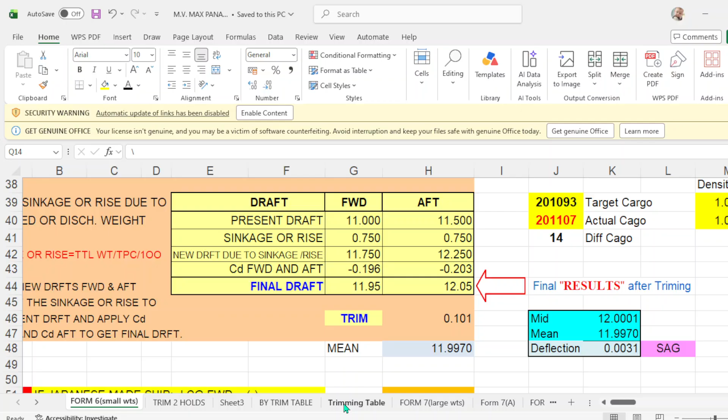Okay, so I use the program with the Max Panama. This is the vessel, MV Max Panama. So let's start.

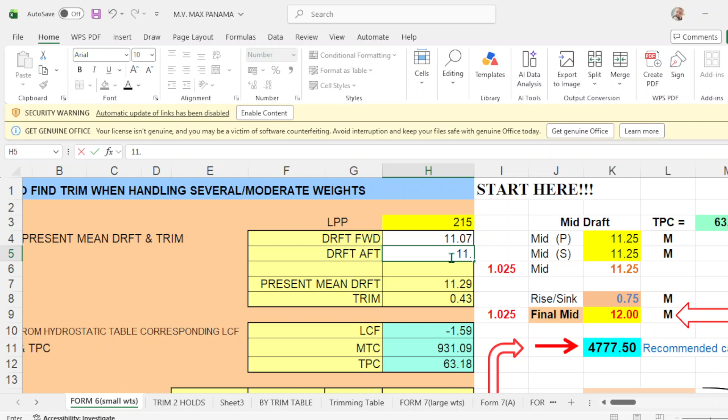What is his present draft forward? Present draft forward is, okay let's make this bigger, present draft forward is 11.07. And his aft draft is 11.35. And take note that the mean is 11.21.

So let's say the actual midport is 11.21. And the starboard actual mid is 11.21. No list. Okay.

Then according to the problem, it doesn't say here the final departure or departure draft. It doesn't say. It says the amount of cargo to be loaded is 1,965.

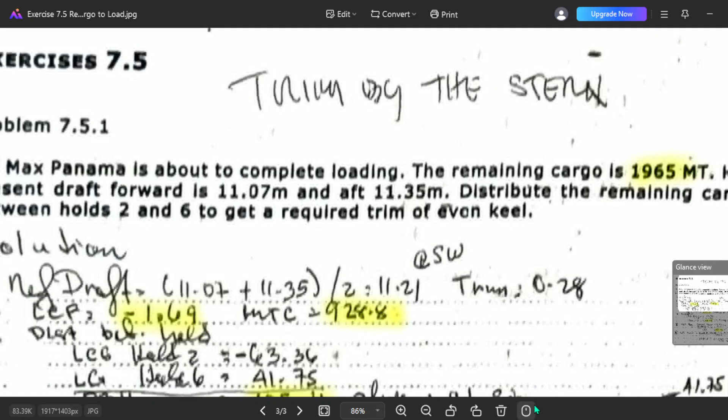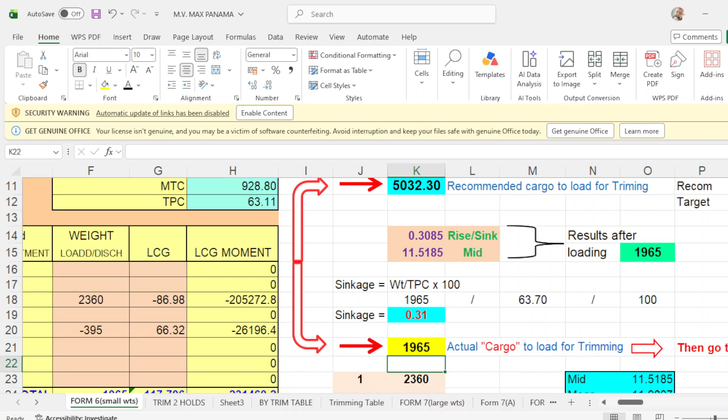1965. So this 1965, we don't have yet a departure draft, so we just put this to 0. So we don't know yet our departure draft.

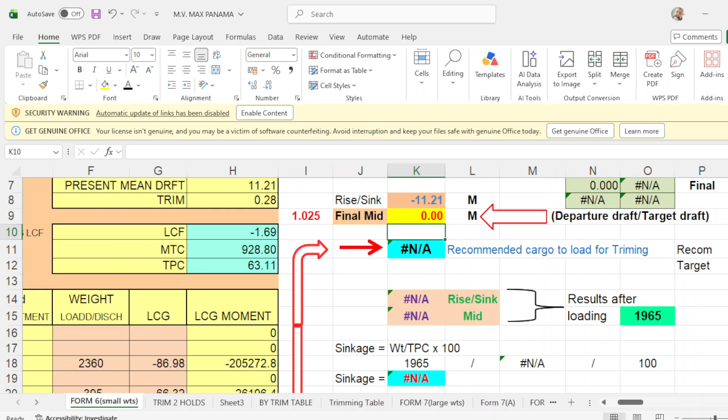Okay, so what we know is that we have to load 1,965. So I go up and I put here 1965. And beside this one, you put the initial TPC of the initial draft. So TPC is 63.11. Put here 63.11.

And this amount of cargo to be loaded of 1965 divided by your TPC of 63.11 is 31.15. Divide this by 100, that will be 0.311 or 0.31. Okay, that is the sinkage.

So your present mean draft is 11.21 plus your sinkage of 0.31, that will be the final draft is 11.52. Now this will be your final draft. So if you put here, final draft is 11.52.

And take note that the value of the cargo recommended to load is almost the same. It was 1 ton difference. Okay, so what we do? 1 ton difference.

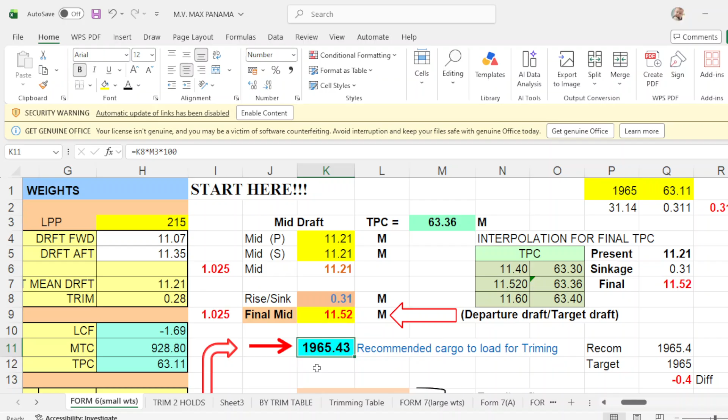Let's say make it, reduce it a little more. Make it 1. Oh, so make it... now it's 1965. So it's here, almost the same here.

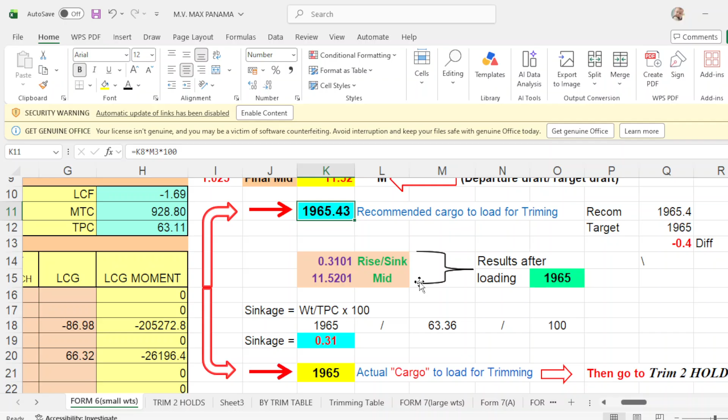1965. So what's the result after loading 1965? Then your draft is 11.5201, which is almost the same here, and your sinkage is 0.3101. It's almost the same, no? The same.

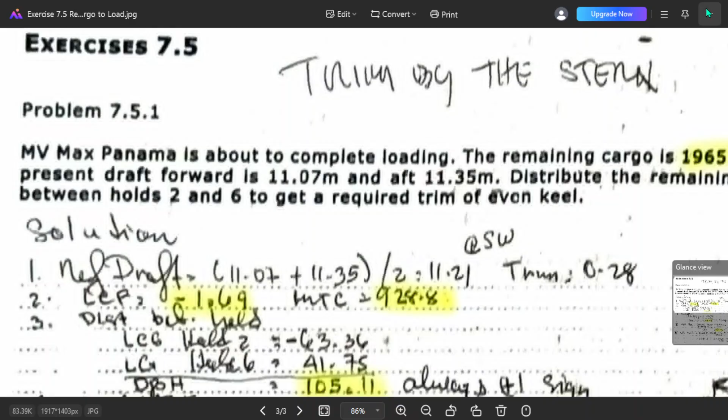Then he says distribute the remaining cargo between holds 2 and 6 to get a required trim of even keel. So we have to distribute this to holds 2 and 6 and make it even keel. So this is the actual cargo to load for trimming.

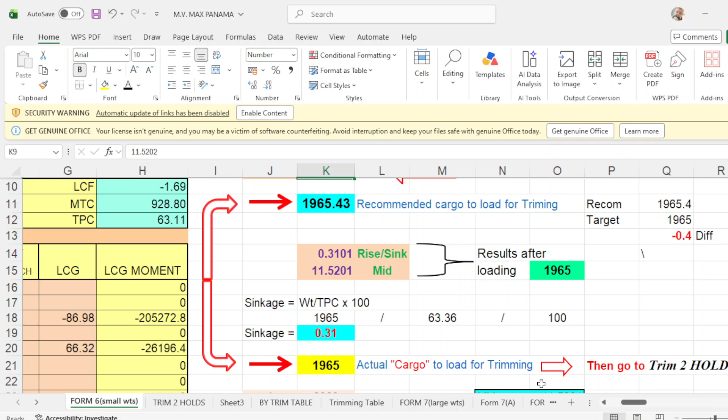Then go to trim 2 holds. So you go to trim 2 holds. There you go. Trimming with 2 holds. Take note of the remaining cargo to load is 1965. Okay, this is the initial draft, mean draft, trim, and the initial MTC, LCF, and TPC.

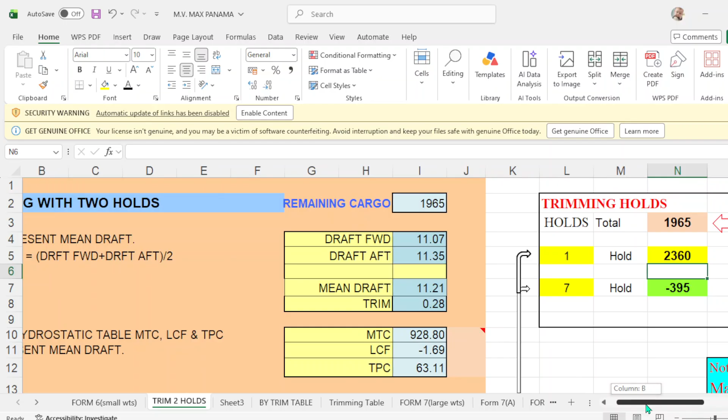Move this a little further aside. Then your trimming hold is 2. Okay, enter. And 6, take note 6. And you scroll down. It says...

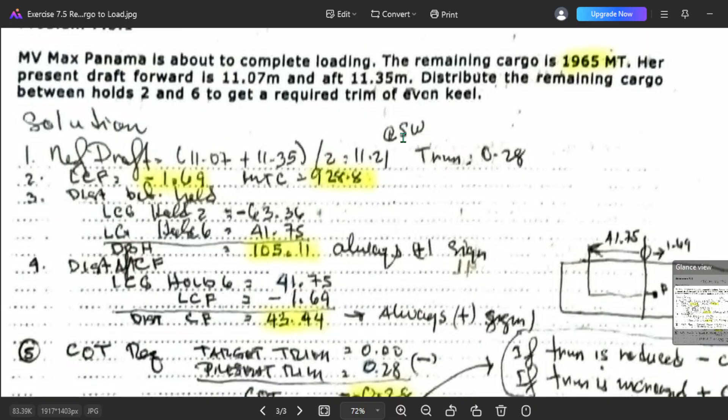The problem says it should be even keel. Required trim of even keel. So make it even keel, so final trim should be 0 because of even keel. Then you scroll down.

How much are you going to load in hold number 2? That will be 1059 or 1059. So go up.

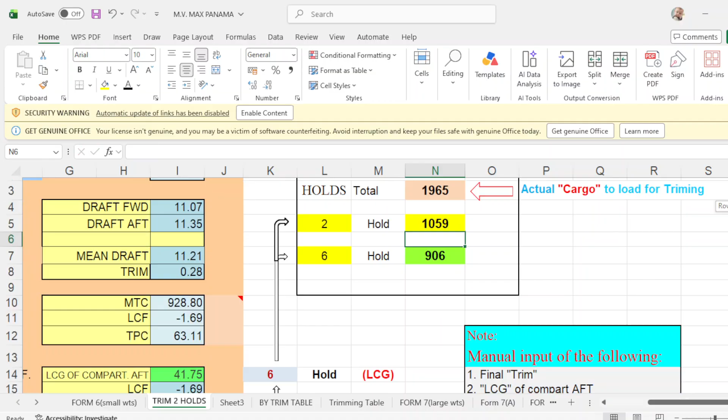1059 there. And number 6 should be 906, okay? Number 6 is 906. Run it up. And your final draft or departure draft: forward is 1152, aft draft is 1152, zero trim, and your mean is 1152.

Deflection is 0. Okay, so how did I get your mid draft? Press this equals, go to form number 6. When you load 1965, this will be your mid departure mid. Press enter. There you go. And your mean, press equals. This is your mean. Then your deflection is 0. Then we go to form number 6.

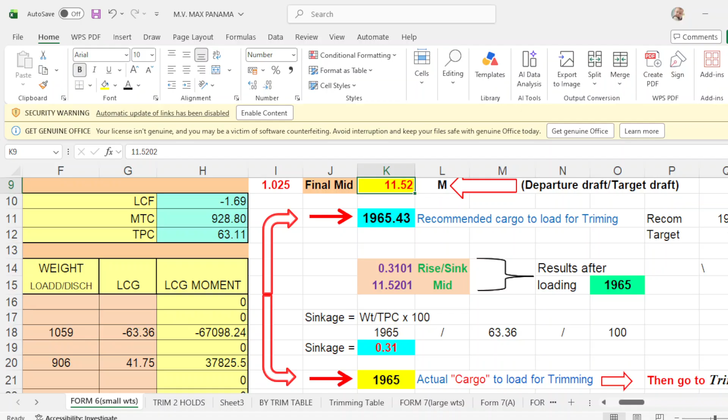Take note of the cargo's trimming: cargo is 2 and 6, and the cargo to load in 2 and 6. 2 is 1059 and 6 is 906. So from here, you put the cargoes 2 and 6, the load, the cargo to load in each cargo, which is 1059, number 6 is 906, and let's check the LCG.

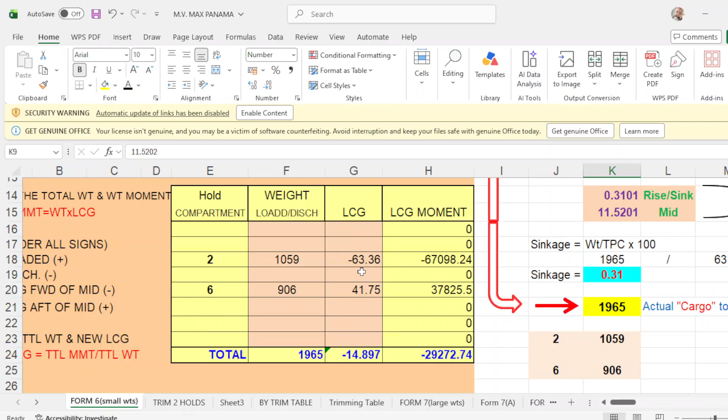Apply the LCG. Okay, scroll down. The LCG of number 2 is negative 6336, and hold number 6 is 4175. Then scroll down.

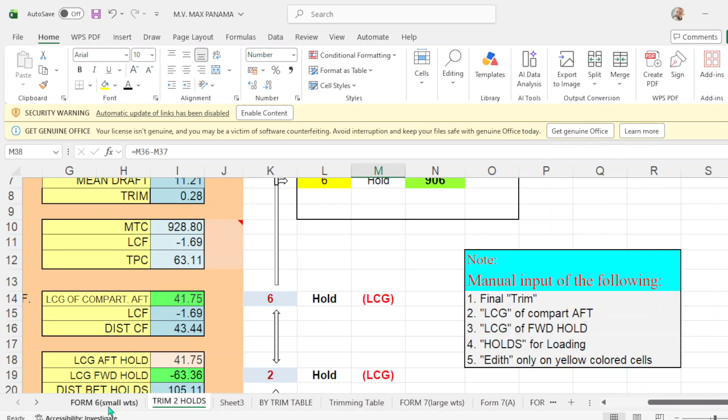Your departure drop forward is 11.52 and aft draft is 11.52. Your trim is 0. Your mean draft is 11.52. So you met the criteria of the problem: distribute the remaining cargo between two holds to get a required trim of even keel. So we are even keel, okay, we are now even keel.

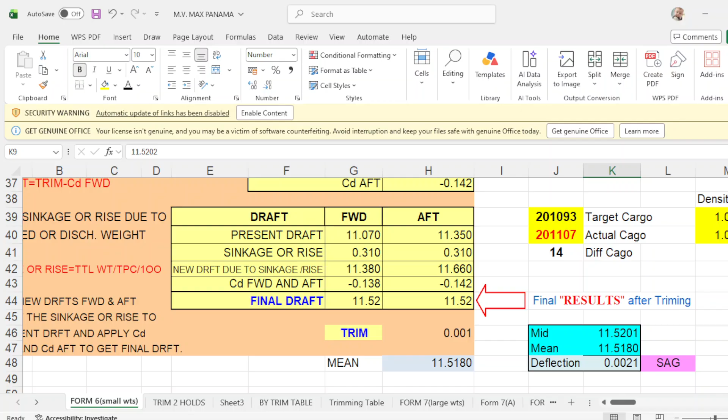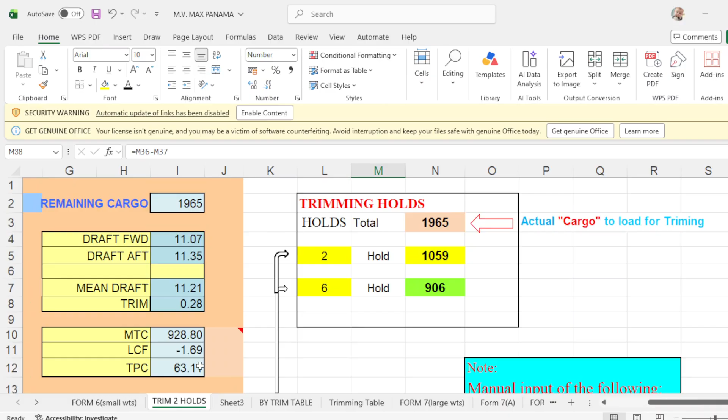And your mean draft is 11.52. That is program number 1, which is how to find trim when handling several moderate weights. This is for number 6, and trim 2 holds. Okay, trimming with 2 holds.

Scroll down. And here you have even keel: forward 11.52, aft 11.52, 0 trim, and your main is 11.52 with 0 deflection. Then the third program is the trim table, by trim table.

Trimming table. Take note of the remaining cargo to load is 1965, and your trimming hold is 2 and 6. This is the cargo to be loaded in number 2 and number 6. Then we will apply the correct forward and aft correction of hold number 2 and hold number 6. Then we go to the trimming table or correction table.

Our draft is almost 12 meters because it's 11.52, it's almost 12 meters. So you select the 12 meters and hold number 2, and the forward correction is 4.8. Okay, then you put here 4.8. Just a moment.

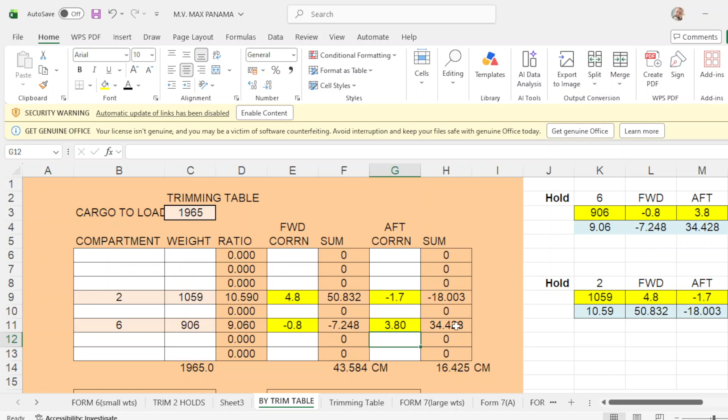9, there you go. Then we will adjust aft correction. Now the trim is 0. We will now adjust this aft draft. So aft correction, we make this 9. Okay. You are now trimmed by the stern.

So make this trim by the stern. Make this 5. Say make this 5, forward. Or make this 4.95, 4.95, 4.95. There you go. You are now even keel of 11.52, 11.52, and your deflection is 0.

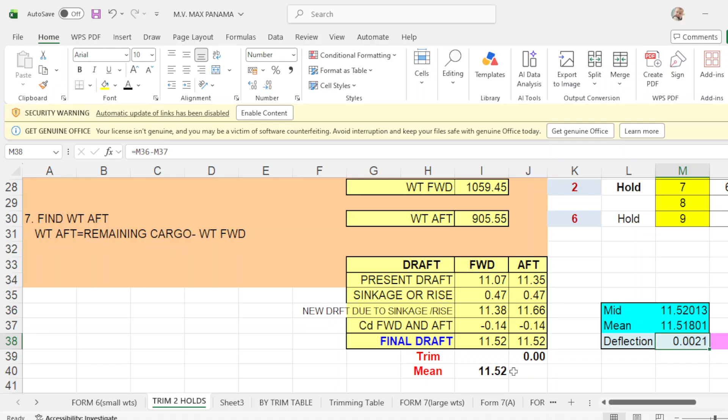Okay, so this is your third program. First program is form number 6, which is even keel of 11.52, forward and up, trim 2 holds, even keel of 11.52, forward and up, and by trim table, your third program is even keel of 11.52, forward and up by trim table.

And the last program, the fourth program, is form number 7. Form number 7 is how to find draft and trim when handling weights involving large changes in mean draft. So the density is 1.025 because it doesn't mention any density here, so we assume that it's already salt water density 1.025. Okay, and what is the draft forward? Is 11.07, put here 11.07, and aft draft is how much? Is 11.35, put here 11.35.

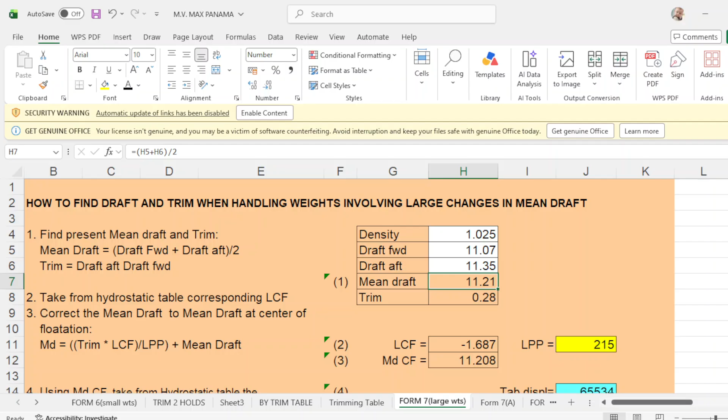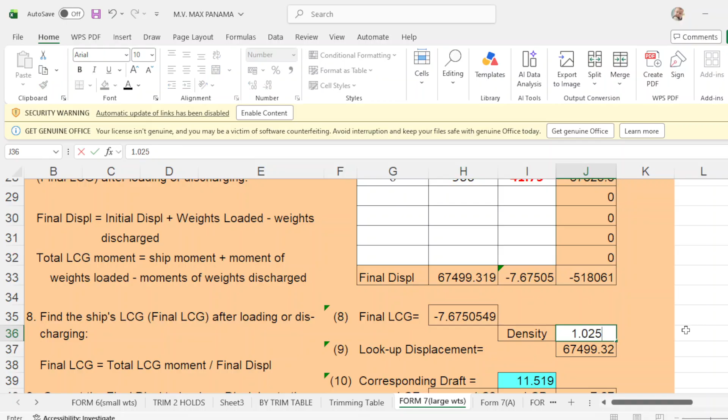11.35. Okay. Then your drop, your density all throughout after completion of loading is 1.025. It was salt water, 1.025. Okay. Then you apply here the cargo holds 2 and 6.

How much are you going to load in 2 and 6? Okay. 2 is 1059, and 6 is 906. Okay.

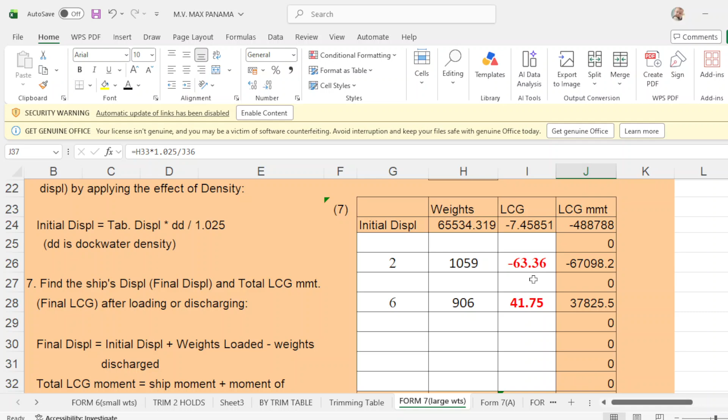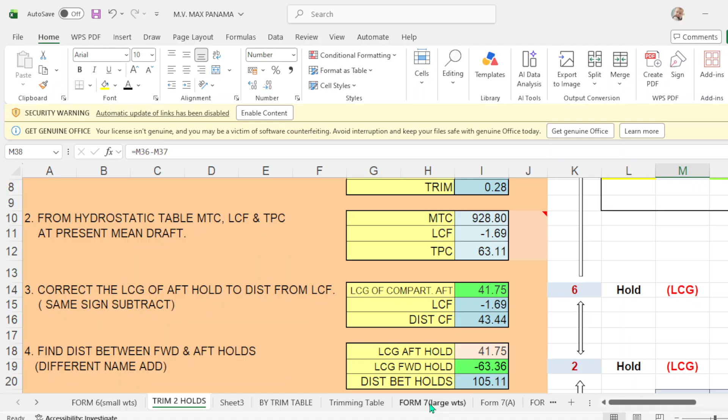Then what is the LCG of hold number 2 and 6? The hold number 2 is how much? LCG of hold number 2 is negative 63.36. And hold number 6 is 41.75. Okay, confirm.

Once it is confirmed, scroll down. Take note that your mid draft here is 11.519, which is almost 11.52, and the forward and aft draft and the mean draft is even keel of 11.52. Forward 11.52, aft draft 11.52, mean draft is 11.52. Zero trim, and your deflection is 0.

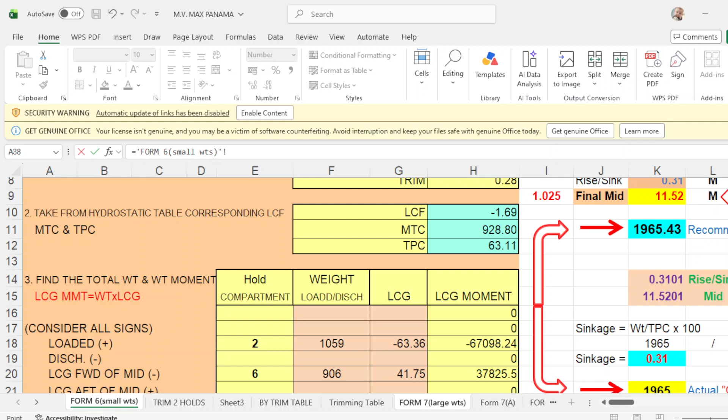Again, how did you get your mid draft? This equals. Then you go to form number 6, go up. Once you load 1965, I'm sorry, once you load 1965, then this will be your mid draft, partial mid draft, 11.5201. Okay. Click this one and press enter.

Then there you go, 11.5201. Then your mean, press equals, and this will be your mean. Okay. Then your deflection is 0.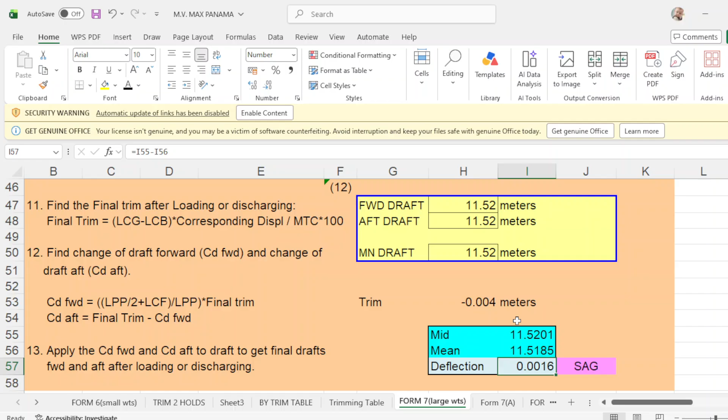So we have 4 programs. Form number 7, even keel. Number 2, by trim table, even keel. And by trim 2 holds, it is even keel. And by form number 6, this 4 program is also even keel. Okay. Now,

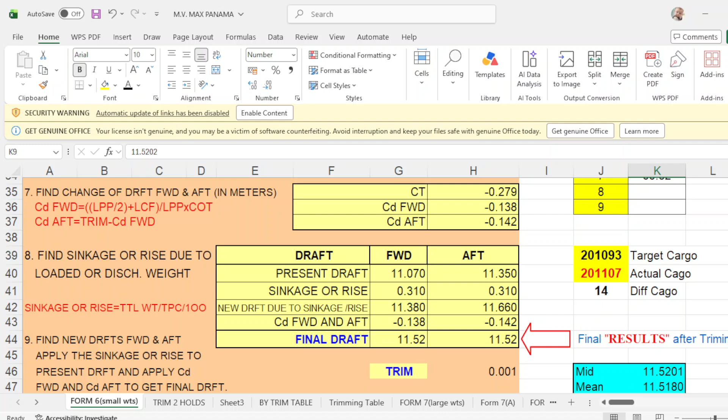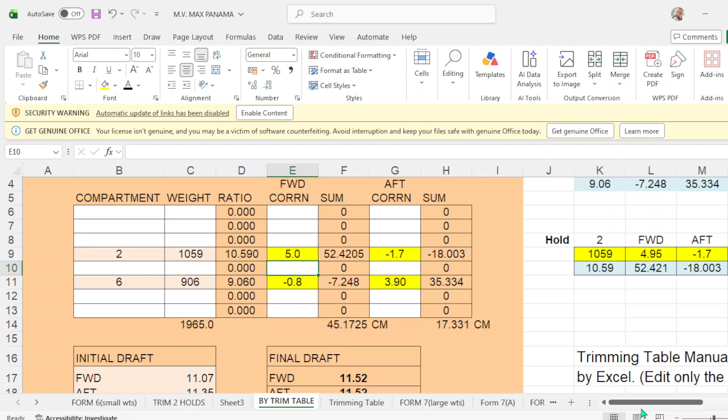In trim table, you don't know which cargo load to load first. It's either 2 and 6. But I prefer to load hold number 6 so that you will have a good trim before going to be even keel. So here, I made a program that you should load first hold number 6, after that you load hold number 2.

So take note, hold number 6 is 906, cargo, forward is negative 0.8, and aft correction is 3.9. In hold number 2, cargo is 1059, forward correction is 4.95. Okay, 495. Make this like this. 495. So 495, and your aft correction is negative 1.7. Okay.

This is your initial draft. Forward 11.07, aft draft is 11.35. Once completed loading of 906, then your draft would be forward 11, and aft will be 11.70. You are trimmed here by the stern. So after loading number 6, then you will load in number 2 of 1059.

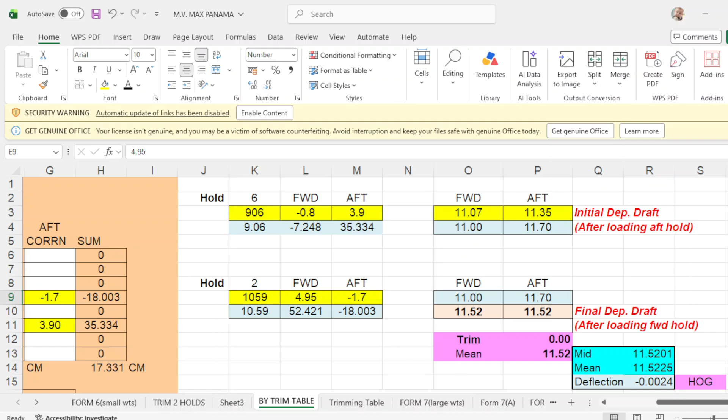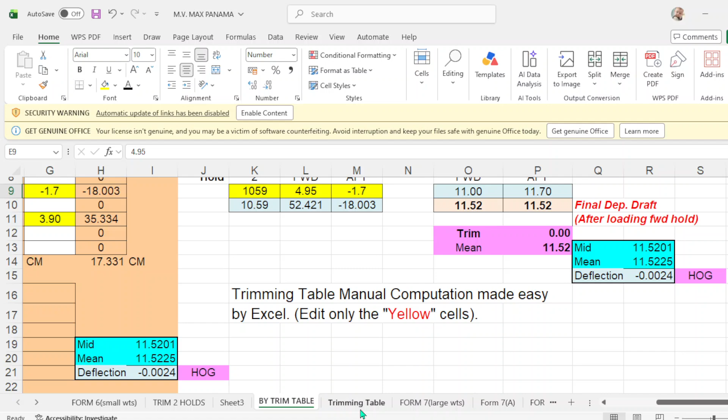After loading 1059, then your departure draft forward will be 11.52, aft draft 11.52. Your trim is 0, and your mean draft is 11.52. Okay? And your deflection is 0. This is the same as this one. Okay, this is for the vessel Max Panama, which is this one. Okay?

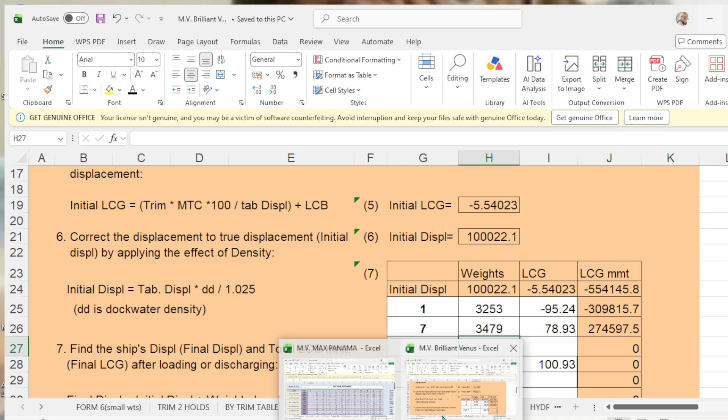Max Panamax. Then, for example, another capesize vessel would like to load the same drop, and that will be another Panamax vessel. That will be MV Brilliant with 7 holds. Okay? With 7 holds. Okay? Assuming it's also to load the same amount of cargo, the same drop.

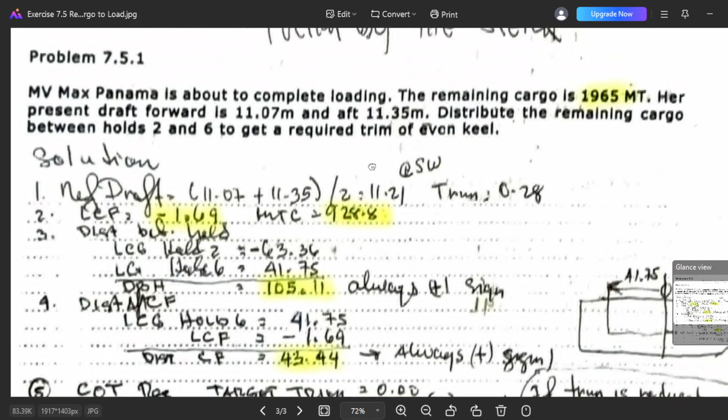So we put to form number 6. Go to form number 6, which is how to find trim when handling several moderate weights. Okay, the draft forward is 11.07. Aft draft is 11.35, 11.35, which is, okay, draft forward is 11.07, aft is 11.35. Okay,

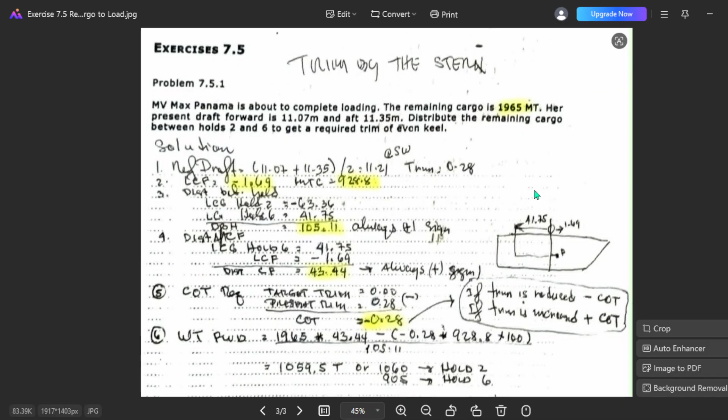then the actual mid port would be, for example, 11.21. The same with your mean draft here. Actual mid port 11.21, and mid starboard is also 11.21. Okay, you don't know yet your sailing draft, what is 0, but you know already how much cargo to load, which is how much, which is 1965. Okay, so you put here cargo to load of 1965.

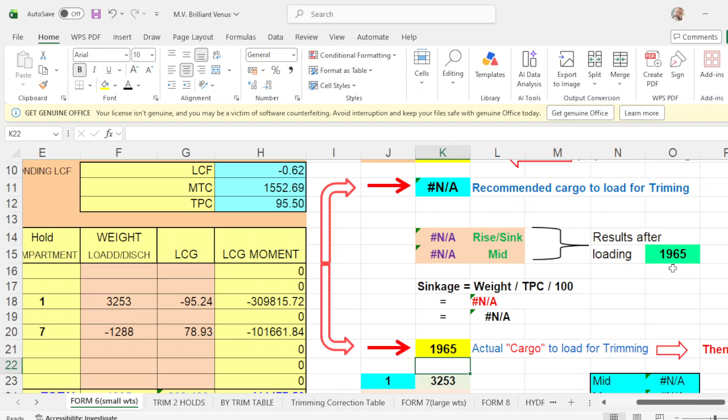1965. You don't know how much your departure draft will be after loading 1965. So what you do is put 1965 in this cell, and beside it you take out the initial TPC of the initial draft. The TPC is 95.50, so you put 95.50 here.

What you do is take this amount of cargo and divide it by your TPC of 95.50, that will be 20.58. Divide this by 100, that will be 0.21. You put this one to be exact.

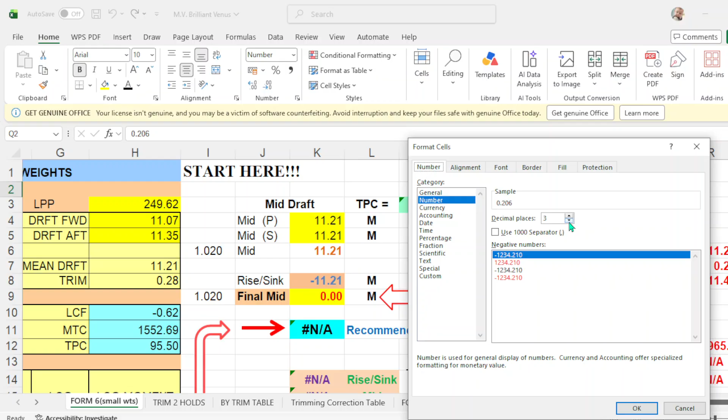That will be 0.206, but to round it up, copy, paste, for example, that will be 0.206. But if you round it up, that will be 0.21. So your present draft is 11.21 plus your sinkage of 0.21.

That will be how much? How much is here? It should be 11, final 11.42.

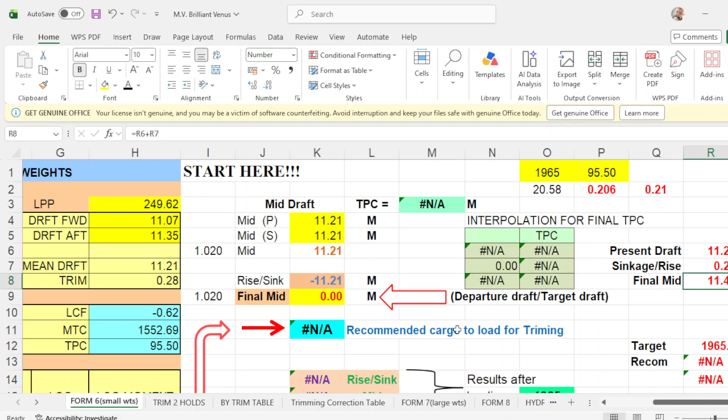Let me check, guys, ha? I want to make sure.

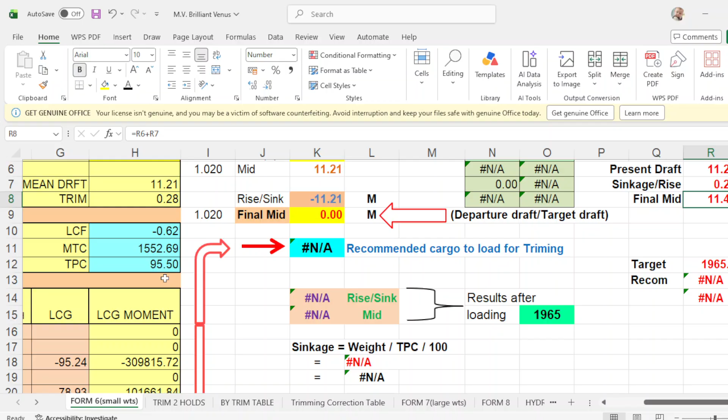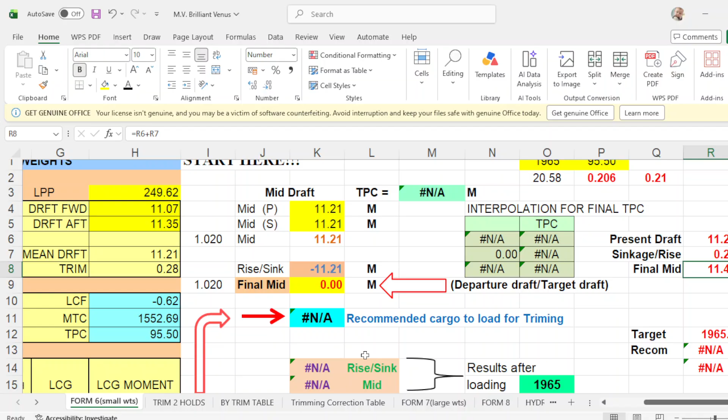TPC number 6. Make this double check, guys, 6. Okay, 6. Go to hydrostatic table. I want to double check this one, guys. This is number 6.

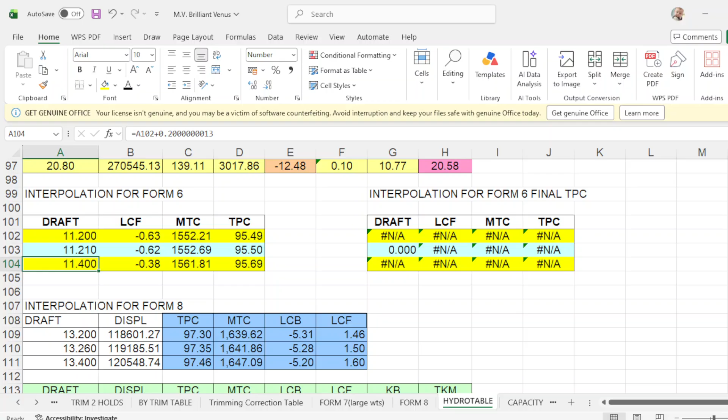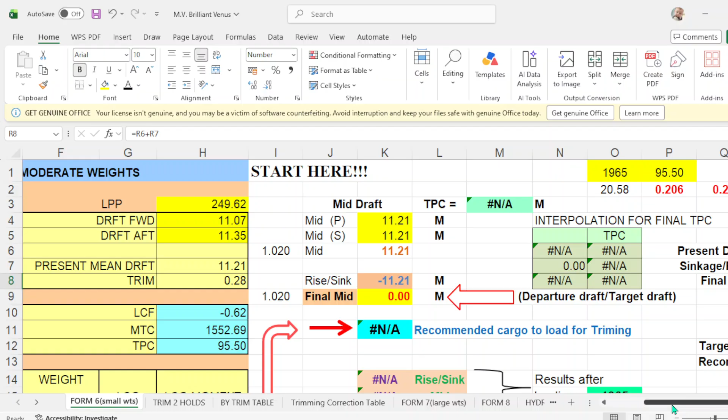That will be 1965. Okay, 1965. If you load 1965, then your drop forward, mid draft will be partial 11.4153.

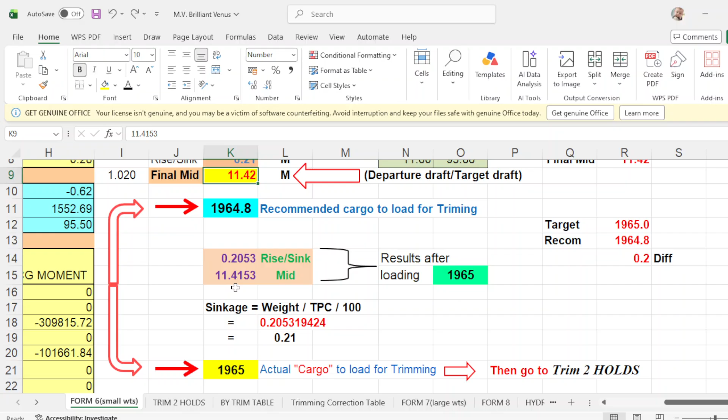So what you have here, 11.4153 exactly, and your sinkage is 0.2053, which, to round it up, that will be 0.21. Okay?

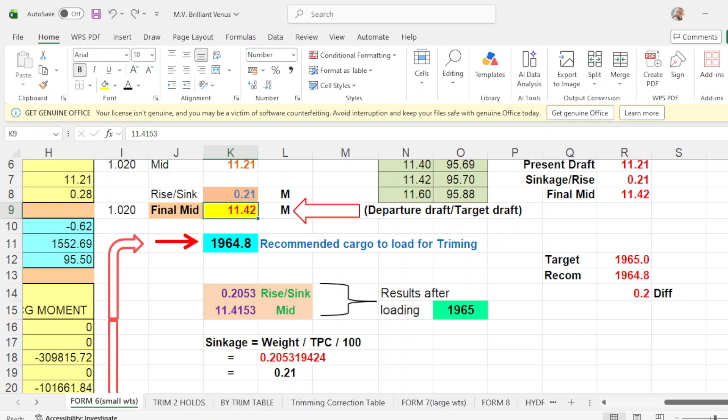Then you go to trim 2 holds. You trim 2 holds. This is your initial draft, your mean draft, and your MTC, LCF, and TPC. And your trimming hold is 2. You press 2, enter, and your other one is 6. Press enter, then you scroll down.

And your trim is 0, even keel, so put it 0. And how much are you going to load in number 2? Number 2 is 1228, 1228, 1228. And number 6 is 737, 737.

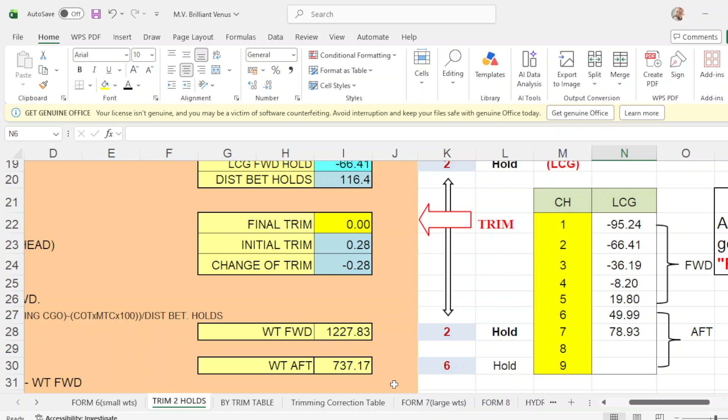And your final draft forward is 11.41, 11.41, 0 trim, and mean draft is 11.41. Okay?

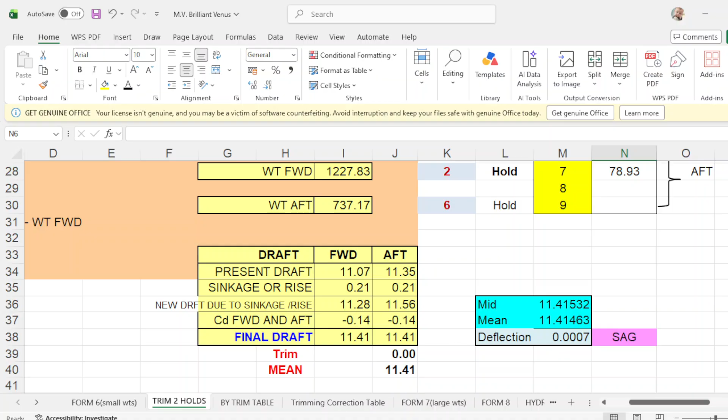With this one of 1965, this is your program number 2, trimming with 2 holds, and problem number 6 is

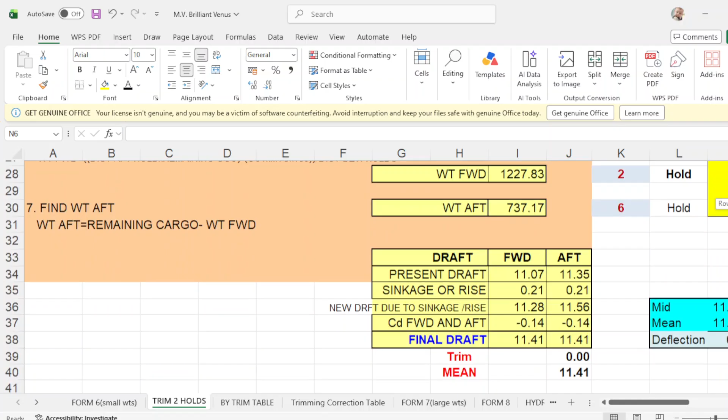how to find trim and handling severe moderate weights. Okay, and your departure draft here is 11.41, forward 11.41, 0 trim, and mean draft is 11.41 and 0 deflection. Here you have the shape 11.41 and your deflection is 0.

Then program number 3, by trim table. Trimming table is this, the amount of cargo to be remaining cargo for trimming, 1965. Your cargo hold 2 and 6, and your cargo for hold number 2 is 1228, 737. Okay, check 12287737. Okay, that is the trim table.

Then you apply now the correction for hold number 2 and 6. So number 2, forward correction is, what is the final draft departure? It's 11.4, so we make this, we can make it to 11. Okay, so we choose 11. I choose 11. So we make this one number 6.

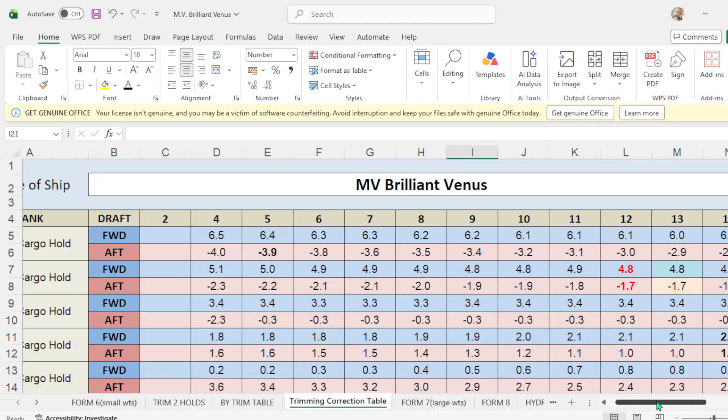Cargo number 2, cargo number 2, this will be cargo number 2. Make this 11. Okay, this one. Make it red, highlight, and okay. Then you make this, put it to black. And okay, then 11, that will be K.

To hold number 6, hold number 6, this is the forward. This one, make it red and bold. This one back to normal, make it black and bold. So we have now number 6.

On hold number 2, forward is 4.9, so forward is 4.9, 4.9. Aft correction is how much? It's negative 1.8, negative 1.8.

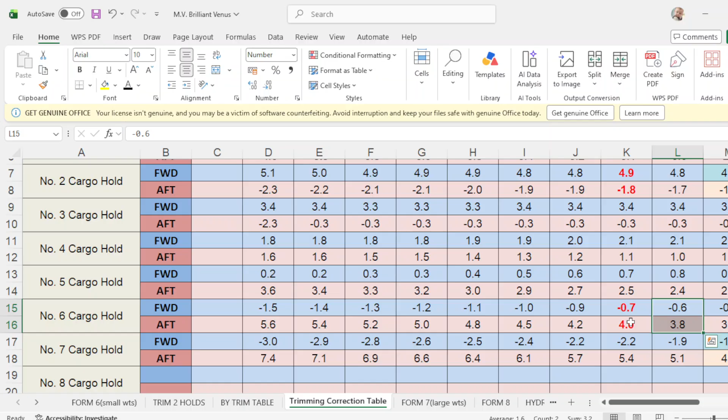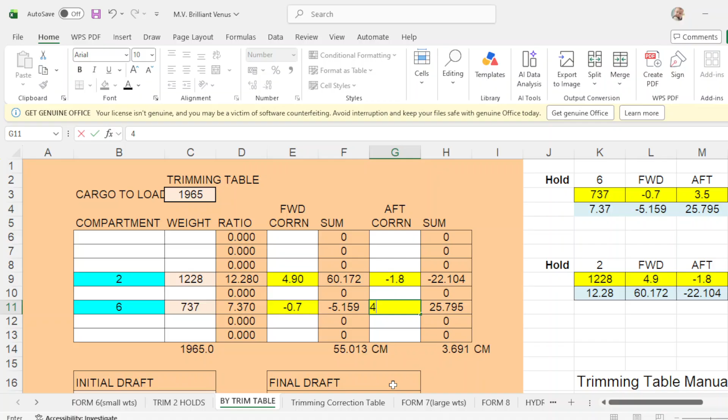And forward correction of hold number 6, I'm sorry, hold number 6, forward correction hold number 6 is negative 0.7. And aft correction is how much? 4.0, this is 4.0, 4.0. Okay, then your final draft is

should be 11.41, right? Then you are trimmed by the head, so reduce this one. Reduce this one. So to reduce that one, you make this, let's say 6. With the 6, take note of the changes of the aft, forward. That will be 6. Okay, so make this 3.

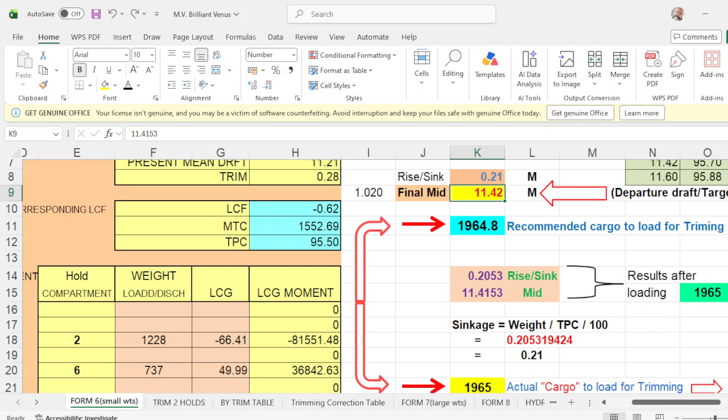Your mid is this one. Okay, your mid is, how much is your mid? Mid is 11.415, okay, so in between. So your mid can be 11.41 or 11.42, then you are still reflection is 0. Okay, so trim number, program number 3 is even keel of 11.41.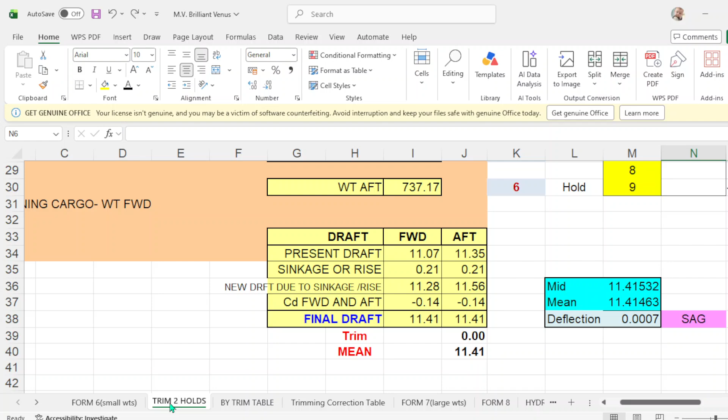11.41, trim 2 holds is even keel of 11.41, and your form number 6, even keel of 11.41. So this is program number 1, program number 2, program number 3. Then we go to program number 4, which is form number 7, how to find trim, draft, and trim when handling weights involving large changes in draft.

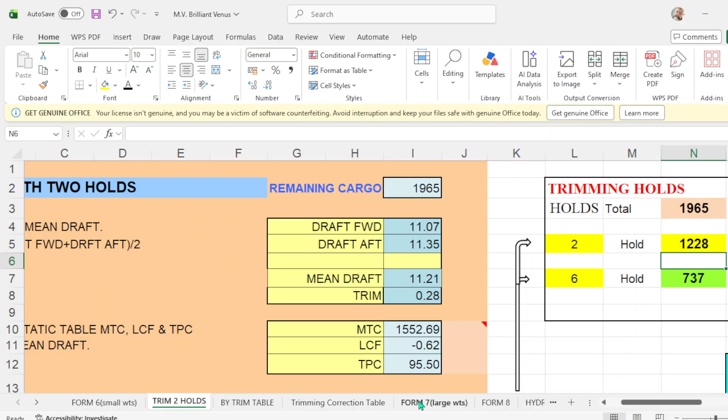So let's assume the density is 1.025 and until completion is 1.025, okay. Then we apply the cargoes to be loaded in 2 and 6. 2 is 1228, put here. 1228. And number 6 is how much? 737. 737.

737. What is the LCG of 2? LCG of 2 is negative 66.41. Okay, negative 66.41. And 6 is 49.99. Okay? Then you scroll down.

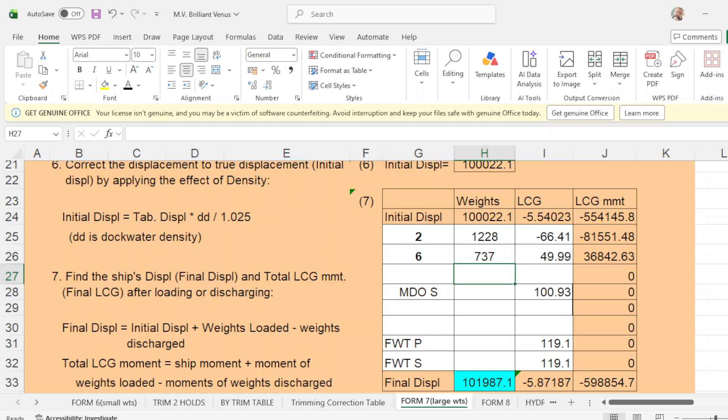Forward is 11.07. Okay, 11.07, and aft is 11.35. Okay, 11.35, 11.35,

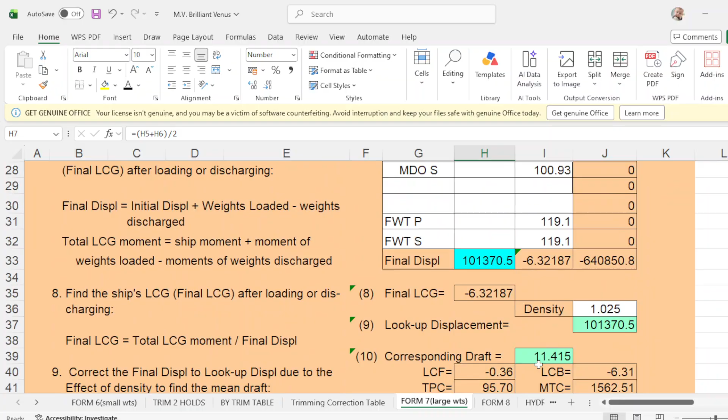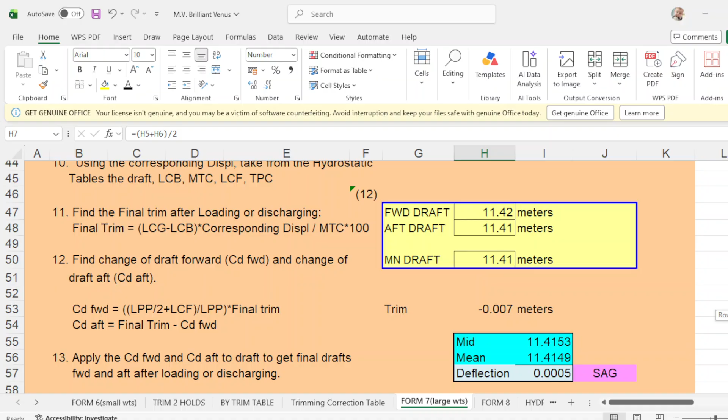and then your final draft, your mid draft now is 11.41, and here your forward is 11.42, aft is 11.41, mean is 11.41, then you have zero deflection, and your trim is 0. So it's an even keel of 11.41. But what is more important is your mean draft of 11.41, that is very more important. Regardless of the draft here, forward and aft, but if your mid draft is 11.41, then it's okay. You can still get the cargo. Here, 11.41, the mean draft. Okay?

So that's it, guys, you have 4 programs to back you up. Form 7, which is how to find draft trim when handling weights involving large changes in mean draft. This is form number 7.

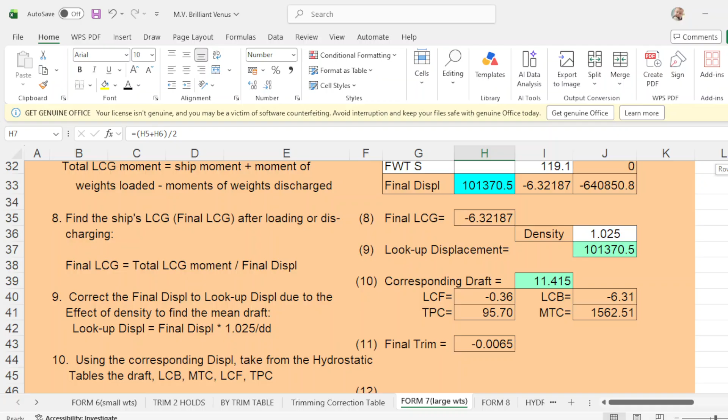Okay, you have your even keel here, 0 trim, and your trim table, program number 2 is 11.41, which is trimming table. Okay, and program number 3, trim 2 holds, trimming with 2 holds, then your draft is 11.41 even keel. Okay, and you have here 0 deflection.

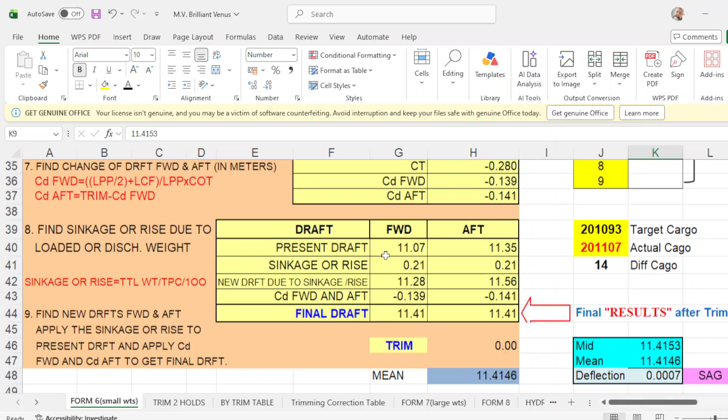And the fourth program is form number 6, which is how to find trim when handling several moderate weights. And you have here 11.41 even keel. Now, you might ask, why is the draft different from the previous vessel?

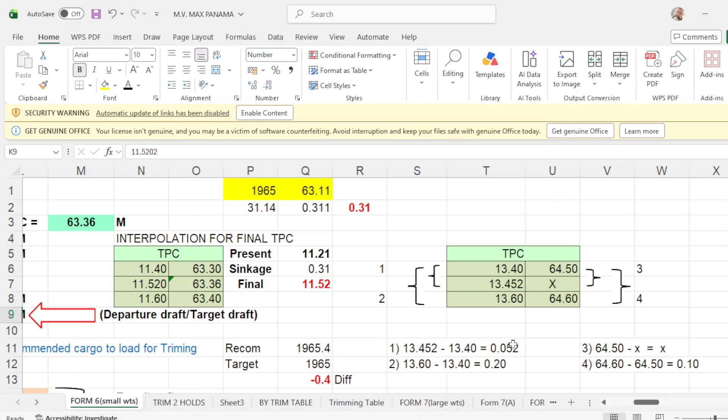Take note, guys, the LPP of this vessel, MV Brilliant Venus, the LPP is 249.62, while the other vessel, Max Panama, the LPP is 215. So there's a big difference, 215 versus 249. See? That's why they have a different departure draft.

This one is 11.41 even keel, and the Max Panama is 11.52. But the question is, they should be in an even keel after they have loaded 1965 metric tons for the Max Panama.

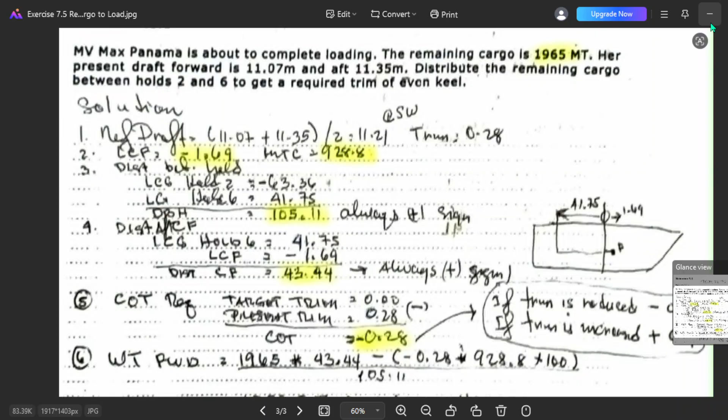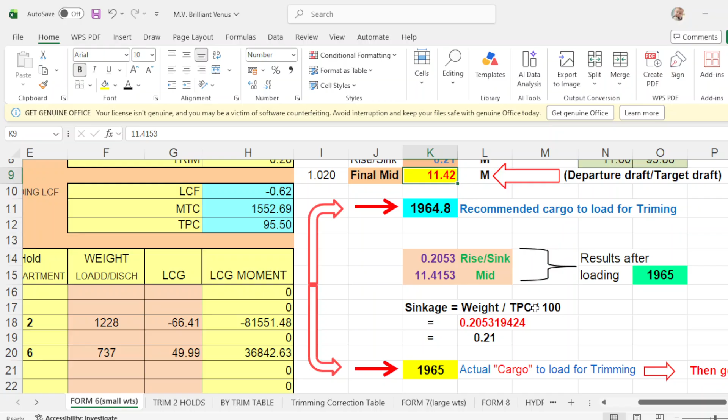Okay, but in MV Brilliant, his recommended cargo to load was still 1965, but they have different draft. Okay, if the Brilliant loads 1965, his departure draft would be 11.41, while in the Max Panama, if he loads 1965, his departure draft would be 11.52. Okay,